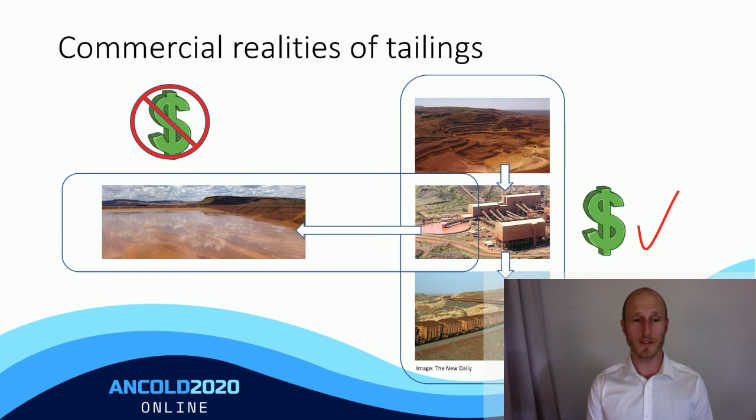So the commercial reality of tailings is simple. Tailings aren't part of the money-making process for mines. They sit to the side. There's sometimes a little bit of value in tailings, in reuse, but certainly it's treated as a waste product. So the temptation there is for tailings to not receive the same attention in terms of resource, cost, time, these variables I talked about, as compared to other aspects of a mining process.

So project management fundamentals, talking about these variables, and really what it comes down to is how they impact quality. From a project management perspective, quality is really achieving that nice even balance of time, cost and scope. Obviously you're getting your value for the money, but also you're completing it within a reasonable time frame. So in a geometrical sense, that really means that your project management triangle is remaining equilateral.

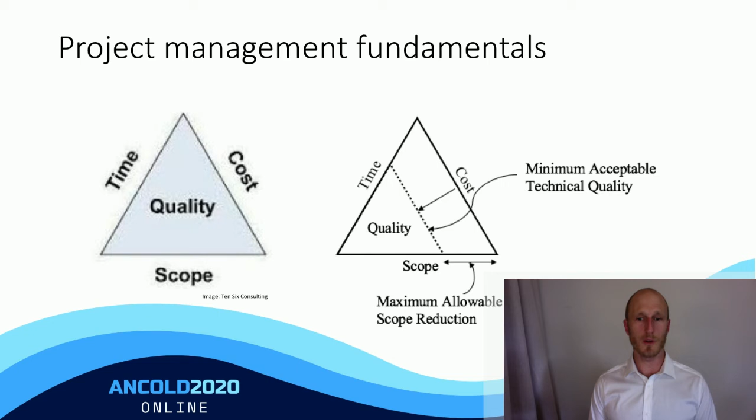But what's of more interest to us is what happens to quality when time, cost and scope are squeezed. So there must be a minimum acceptable quality, which we presented here as the area of the triangle with the dashed line there. So there's only so much that you can reduce the scope of a project until the quality of the outcomes is threatened. And that will become a bit clearer in one of the case studies in particular.

So a few of the fundamentals that form some of the basis of these case studies. Commercial contracts: the negotiations involved in commercial contracts, in a particular example between the designer of a tailings dam and the owner, really are inevitable. We find limit of liability is a very key element of these negotiations.

They really can erode critical project schedule when a contract is presented at the start of a project, or even a contract's awarded. Projects are awarded without a contract, and then the first steps are to negotiate the terms to get them locked away. So really there needs to be allowance for that, and also to acknowledge the real risks that are presented if you erode a critical project schedule during these negotiations, which can affect some critical aspects such as geotechnical investigations or other design activities.

Project funding, so funding for dams and tailings projects, and all projects really, generally comes from an allocated bucket of money which has been determined at an early stage. Say a concept design is used as the basis of funding for detailed design or even construction in an initial stage. And this generally doesn't allow for flexibility and reactiveness. So if circumstances change, additional data comes to light during a geotech investigation, where does that additional money come from?

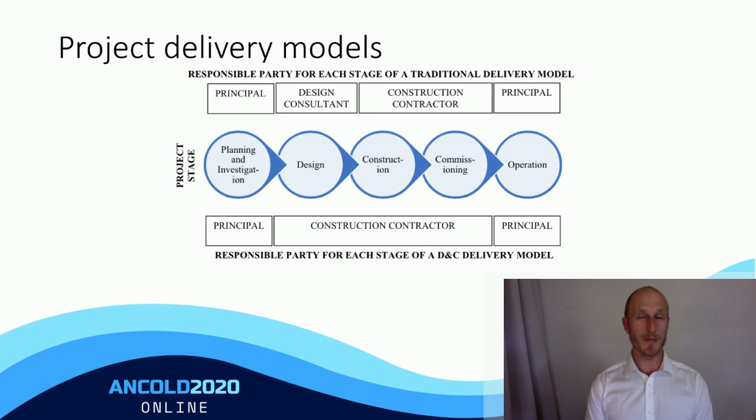So when additional data comes to light, that can be absorbed by the construction contractor. Say, if additional geotechnical data means that a spillway slab needs to be thicker or anchors need to be deeper, that it's still within the allowance of their budget to do that without having to really squeeze the project and find cost savings elsewhere, so they don't overrun.

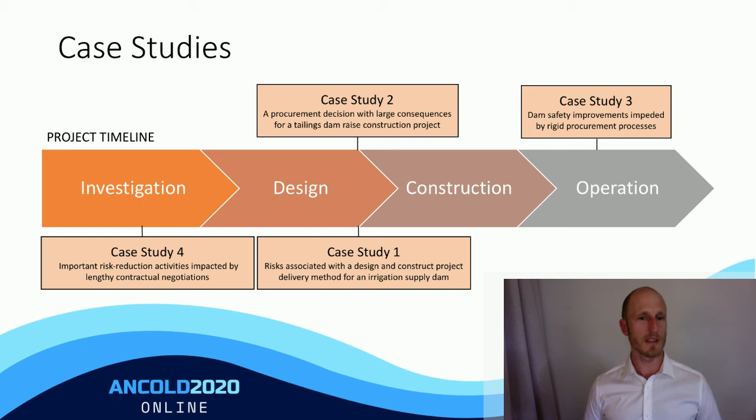So the case studies presented, there are 4 of them. They're plotted along the project timeline there on the screen. So it's really where the decisions were made that's plotted on the timeline there, and where that potential risk was initiated. I won't go into too much detail of those at the moment.

We'll just go through one at a time. So case study 1, this particular one's for an irrigation supply dam that was built under a D&C contract. I mentioned the prelim design was done under quite a restricted schedule and also with limited input data, particularly in the spillway area. Now, what this meant was that the spillway concrete dimensions and ground anchoring were subsequently quite significantly increased during the detailed design compared to the tender design.

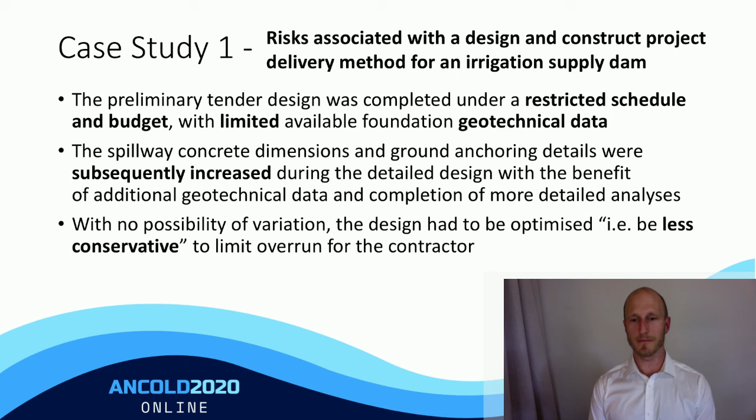And that was with the benefit of additional geotechnical data, but also completion of more detailed hydraulic analysis. So without the possibility of a variation, the design had to be optimised, i.e. be less conservative, in order to limit that overrun for the contractor based on that underdone tender design.

So what's the risk here? The risk is that the contractor's under a lot of commercial pressure, without the ability to have a variation for additional quantities. They're going to try and limit those additional quantities as much as possible. So if that is pushed too far, the structure, in this case a spillway, may not have met the functional requirements.

The reality is that the result of this risk was a tender design under undue time and budget pressures, inadequate input data, but also issues with cost estimation. So there was a bit of a disconnect between the designer and the contractor to understand what assumptions were made in the design, but also how to establish quantities based on very preliminary basic drawings. So that's where some issues came through as well.

If the contractor knew more, then they could have allowed for that with some contingency for certain items. So the lessons here are to consider alternative, more traditional methods outside of a D&C to avoid these risks. But for a D&C, if that's the way to go, then just acknowledge that the tender designs in the schedule need quite a bit of effort to gain that confidence. So they need more time, but perhaps also more budget to do so. And that communication between designer and contractor is really important during the tender design.

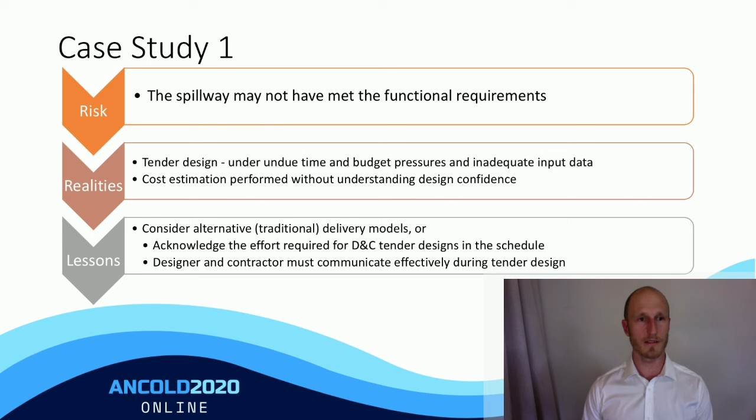Case study 2. This is an interesting one where it was under the traditional delivery model for a tailings dam raise project. By traditional, I mean it was designed, then tendered for construction, then there was construction QA services which were provided by the designer. But the issue with this project was that the procurement process, tendering for the construction, was done without consultation with the designer, without their input.

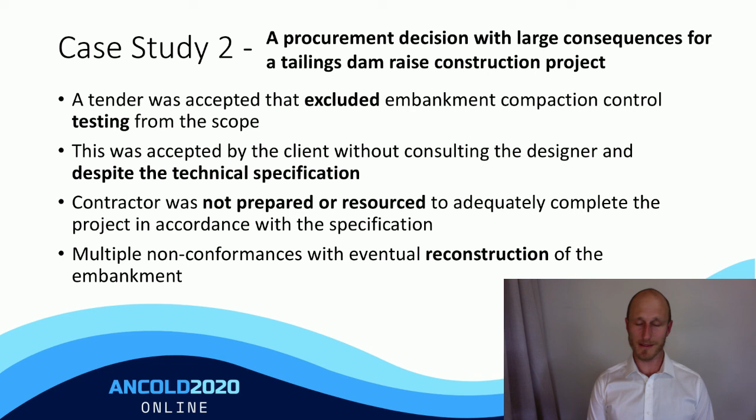Somehow the decision was made to exclude embankment compaction control testing from the scope, despite it being a key requirement of the specification. The contractor was not prepared or resourced to do so, and the designer coming in to perform the QA role was unable to sign off conformance to the specification because of this contractual change made in the scope of the contractor. So multiple non-conformances occurred and eventual reconstruction of the embankment was required.

So the risk there is quite clear. Either inadequate work is going to be done without that compaction control, or the designer's unable to sign it off, so then it can't actually be commissioned.

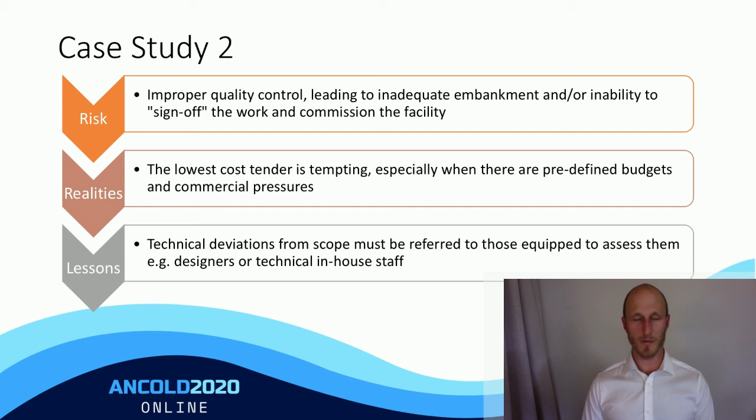The realities that really led to this were that the lowest cost tender is tempting, especially if there's predefined budgets and commercial pressures. The lessons are that any technical deviations from scope must be referred to the designer or have adequate in-house staff making these decisions. That's one of the key findings - having the right people in the right roles making these commercial decisions that can impact dam safety.

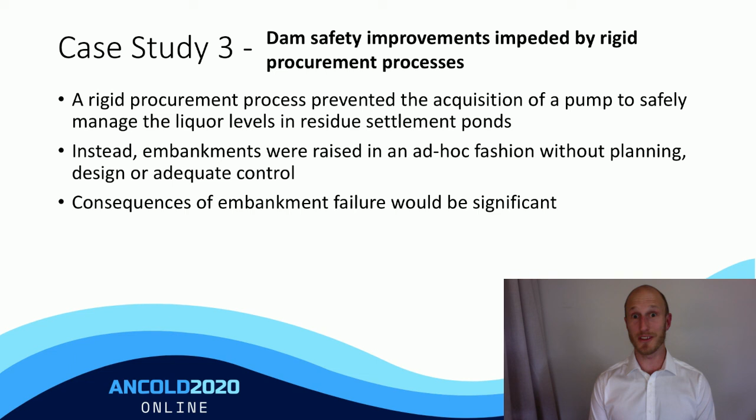The third case study is around a very rigid procurement process. This was at a bauxite mine where residue settlement ponds were reaching capacity due to excess water, requiring a new pump to be procured as a simple solution to manage the water. But because of the procurement process, it wasn't a matter of quickly buying this pump and installing it. The delays meant that the embankment had to be raised in a very ad hoc fashion without design or proper control, introducing new risks of embankment instability.

So in this case, a plan B was executed in favour of circumventing a procurement process, since it wasn't recognised that this high water level in the dam was a serious dam safety risk, and a procurement process should be able to be circumvented to address that risk. Could have been a different story.

The reality is that a procurement process is necessary. There must be a process to manage the quality of equipment and services, and also uphold integrity and control expenditure. There's a duty to abide by the process as part of company procedures, so people making these decisions aren't going to readily go around a company procedure, especially if it's very rigid and well established. The lesson here is, if there's insufficient forward thinking or a previously unidentified hazard that comes up with a tailings dam or water dam operation, it needs to be addressed by circumventing procurement.

So there needs to be an ability to raise either a dam safety incident or a trend that can trigger a process by which procurement can be circumvented, and the decisions need to be made by those who are really responsible for the safe operation of that facility.

The fourth case study is around important risk reduction activities, in this case geotechnical investigations being reduced in scope because the project schedule was eroded by lengthy contractual negotiations. So again, this one's quite simple. There was a very strict milestone that needed to be reached for this tailings dam raise project, and the geotech investigation was on the critical path for that.

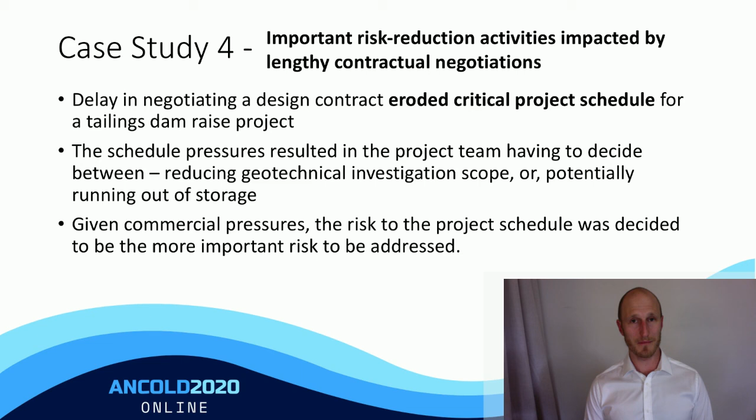So when the start was delayed, a decision was made to reduce the geotech scope and run it in parallel to design, so that if any changes were required to design based on new data, it would be done at the construction phase. But this obviously introduces additional risks of having that parallel work, and also impacting the construction process as well.

The realities here are that contractual negotiations are inevitable, but also that schedule is something much more easily quantifiable and readily understood compared to dam safety and quality. The lessons here are to have terms of engagement for time-critical projects pre-negotiated, any decisions to delay or reduce scope must be taken in full consideration of overall project risks, and to consider separating projects if key outcomes may not be achieved.

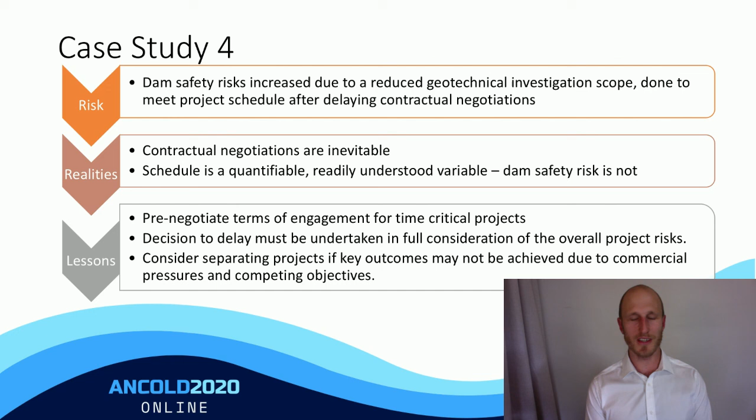Another aspect of this job was that the dam safety review required additional geotech investigations as well, and it was decided to combine those with this raise design project. So the outcomes of that DSR were also threatened.

The conclusions of the paper really boil down to two fundamental issues. One, if there's a misalignment in project quality objectives compared to the commercial objectives of time, schedule, budget, and scope, then these dam safety issues can arise. And if there's a lack of dam safety oriented personnel in commercial decisions, that's another aspect that can cause these risks.

Other findings: design and construct is obviously not always the best, as we've covered. Any project must have adequate technical input at the construction procurement phase. If the designer or technical staff aren't involved, decisions can be made without understanding the consequences. Any rigid procurement processes must be able to be circumvented where there's a dam safety issue. And when combining delivery of projects, in this case the geotech investigation mentioned, care must be taken when doing so.